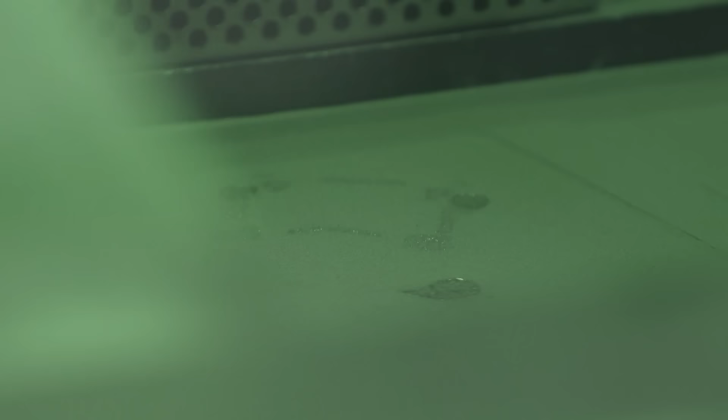Mobility. A concept that humans have pondered over for centuries, if not millennia. And experts keep coming up with the same questions. How can we transport more people and freight? How do we make mobility as safe as possible? And most of all, how do we make it environmentally friendly?

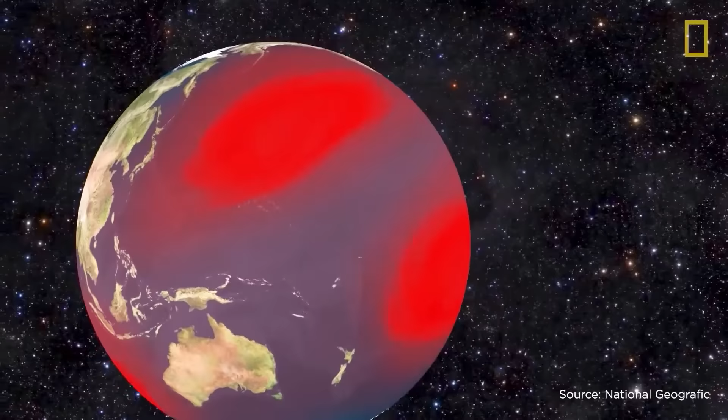About 8 billion people around the world want to enjoy mobility. About 4 billion people fly on planes each year. And about 1 billion cars drive on our roads. Cities are growing, traffic increasing, and environmental pollution is getting out of control. New environmental movements like Fridays for Future and activists like Greta Thunberg denounce the state of affairs.

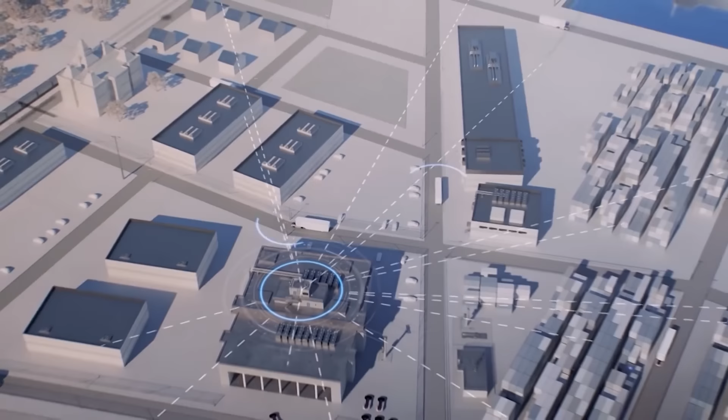There is little time to act. Climate change is man-made and almost impossible to stop. At the same time, digitalization radically changes entire industries and society as a whole. And that opens up new opportunities.

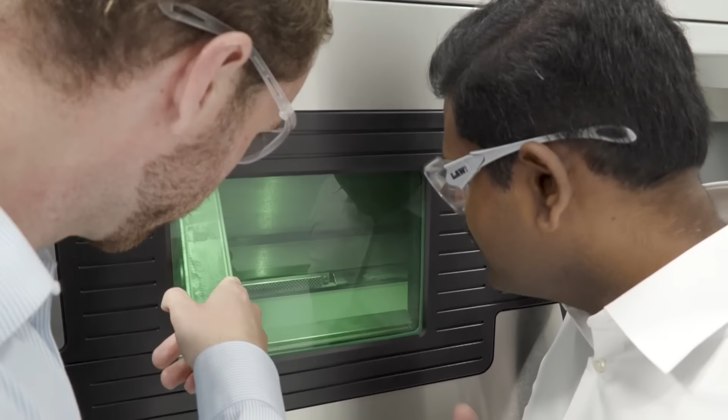We meet experts who rethink mobility and who make it possible. They use 3D metal printing and create coatings for components used in cars, airplanes, and space travel. Our film enters the world of hidden high-tech, super technologies intended to make mobility and our cities safer and cleaner.

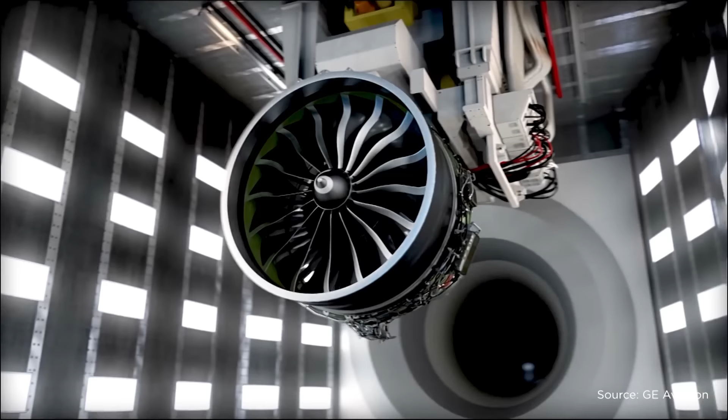Around the world, companies work on making manufacturing more efficient and environmentally friendly. We are visiting a Swiss company called Oerlikon that develops and makes products for the aerospace and automotive industries. The Italian engineer Alessia Toscano, for example, works with 3D printing.

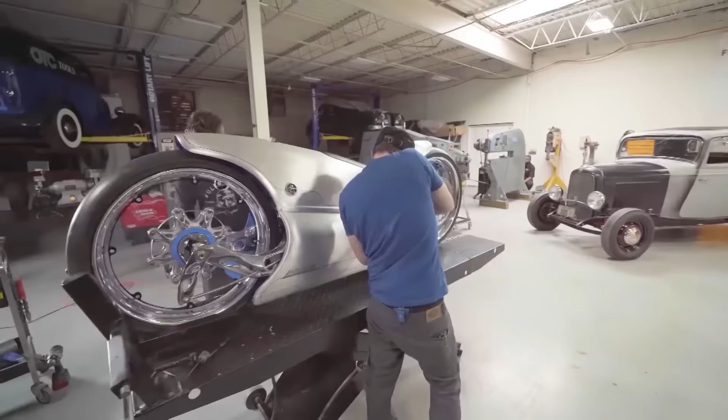I think that with AM you can customize your own part. If you have any part that is in your mind, you have the freedom of design to do whatever you want to print. So I think this is the only technology where you can do this, and that will be the key for the future.

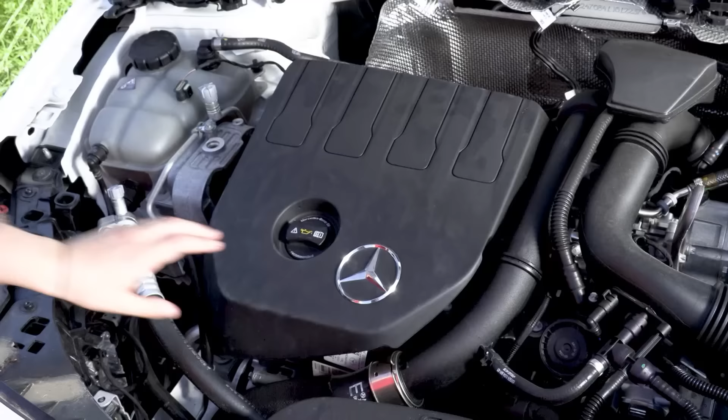She's on a trip to Switzerland, where she wants to talk to her colleagues at Oerlikon on the topic of coating. But first, she takes a break to show us which car parts will soon be printed, rather than made conventionally, including pistons of combustion engines and gas pedals.

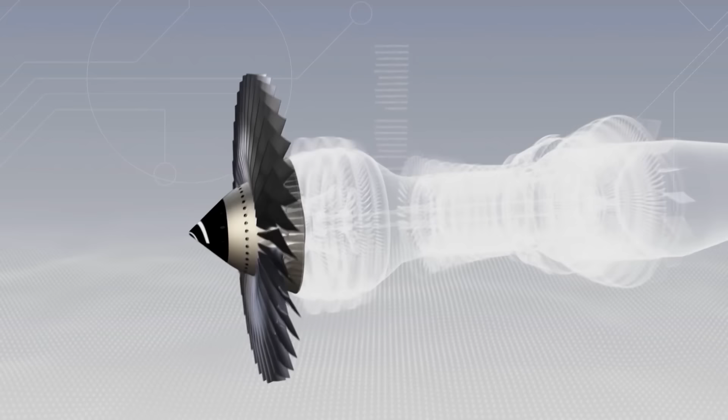And what are examples of 3D printed components? So, for example, for a car, we can produce in AM the bracket, the hinge that lets you close your door in your car. Or, for example, for a plane, we can AM manufacture the blade and the turbine. And for rockets, we are also working to manufacture more and more parts. So AM now is evaluating all the possibilities of all the components in every sector.

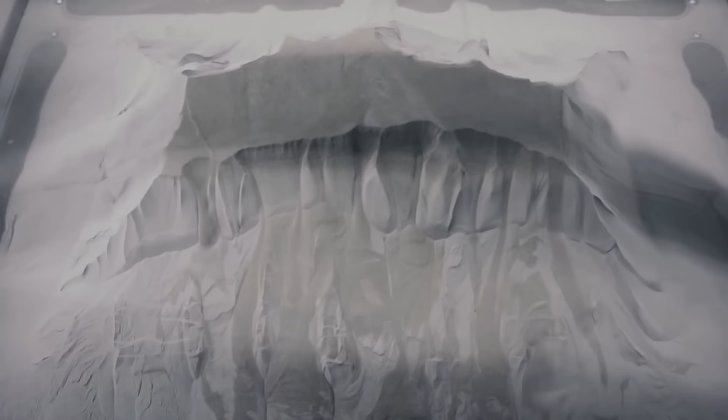So what is additive manufacturing? How does powder turn into a part? And where can we learn more about this technology that is considered an industrial revolution? Well, of course, we have in Oerlikon AM different plants in the USA. For example, we just opened a new center in Huntersville, and they're doing a lot of development. Alessia continues her trip. We will meet her again later. But first, we are going to America.

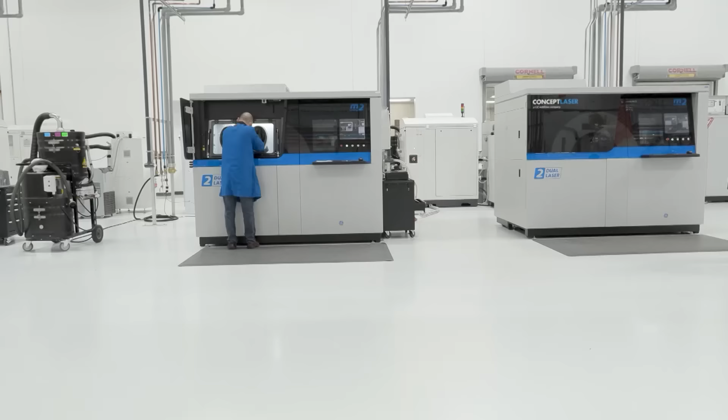There, on the southeastern coast near Charlotte, a new factory for 3D metal printing has just opened. Here we are going to meet leading specialists in the field of additive manufacturing, whose previous clients include NASA and Lockheed Martin. They develop and manufacture components for aerospace applications. Right now, they are using a metal powder to print an antenna bracket that is far more rugged and lighter than anything that came before it.

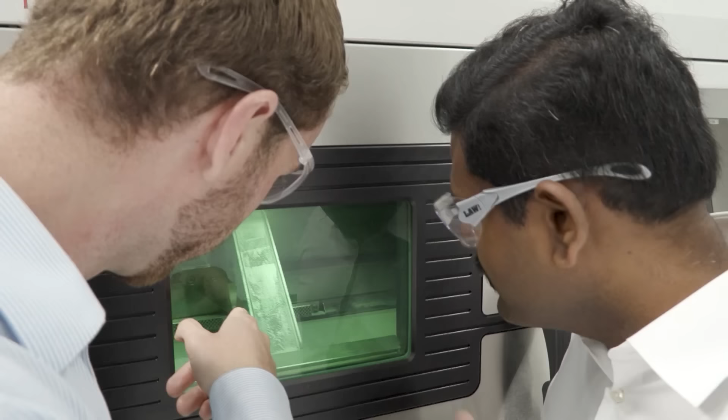This part was developed by RUAG as a demonstration of what could one day fly into space as part of a communication satellite, which provides navigation support using digital geodata. So Oerlikon AM focuses mainly on additive manufacturing, which is often referred to as 3D printing. We focus mainly on metals here. So you'll see behind me some of the printers that we have that do the additive manufacturing process.

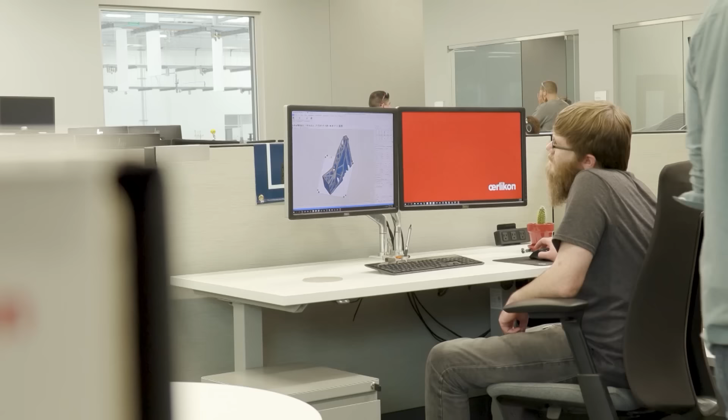And our goal here is to industrialize AM so that we're no longer in the prototype world, we're now moving forward into the production world and making parts that ultimately are going to fly on planes. This factory is the only one of its kind in the US, featuring all the relevant production steps under one roof. From powder blending and testing to printing, heat treatment, finishing, and quality assurance. You could say that here, components are literally made from dust.

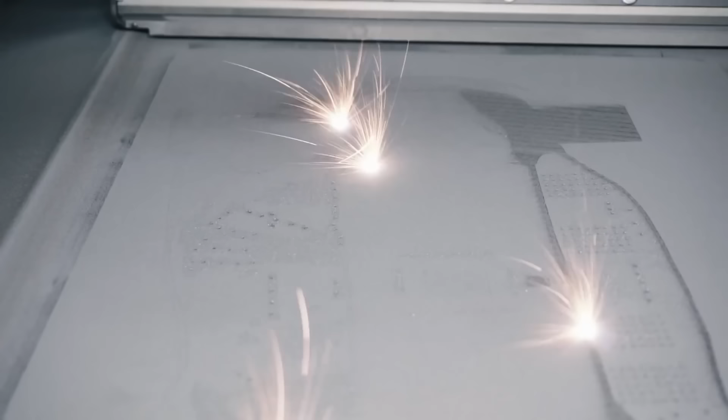We want to understand this better. How does 3D metal printing work? And what makes it so fascinating? Later, we will return to see what became of the antenna bracket.

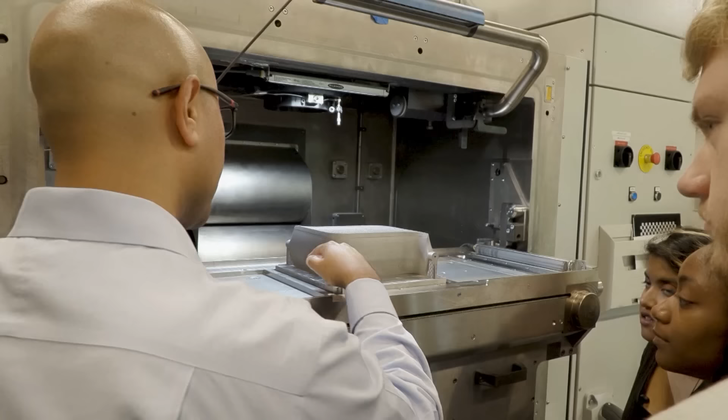To get more detailed information, we are visiting a scientist who's deeply involved in researching additive manufacturing at one of the oldest universities in the country. Penn State University in Pennsylvania. Here we're meeting Abdallah Nassar. With his students, he continues his quest for new applications of this technology.

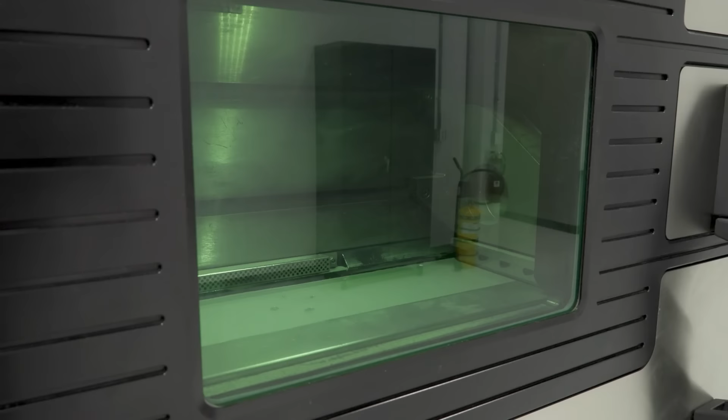So today, additive manufacturing brings together very advanced computer systems that allow you to design very complicated features with the ability to actually build those features using technologies that require lasers moving at very rapid speeds to build up parts literally out of powder. And the newest, where the technology appears to be going is in building ever more complicated structures. Building structures that have never been before built. Building structures that look like nature. Something that doesn't look like it's been manufactured by a human being.

And what those allow us to do is optimize design so that we can get the best performance out of every component that we build, components for custom applications, whether that be for an aerospace application or for a custom car application or for an implant that you put in your body. But what differentiates 3D printing from conventional manufacturing methods?

Classically, designers thought in terms of boxes. Everything was a box, and what you do is you had to take away material from that box to build your finished components. Today, we're reversing that paradigm entirely. Rather than starting from a box, we're starting from nothing. And we're adding little blocks or little layers or little tracks of material one at a time to build up components additively. That's why it's called additive manufacturing, rather than conventional subtractive manufacturing.

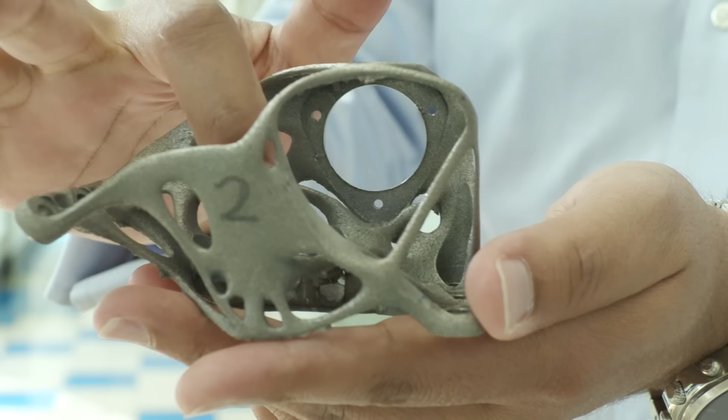Here's an example that shows how important 3D printing will be for the future of mobility. So in this particular case, this structure is to hold a very simple sensor that's put on an aerospace application. But again, without those sensors, your airplane can't fly. So it's a little device that all it serves is to mount some sensors on your vehicle. But without it, nothing happens.

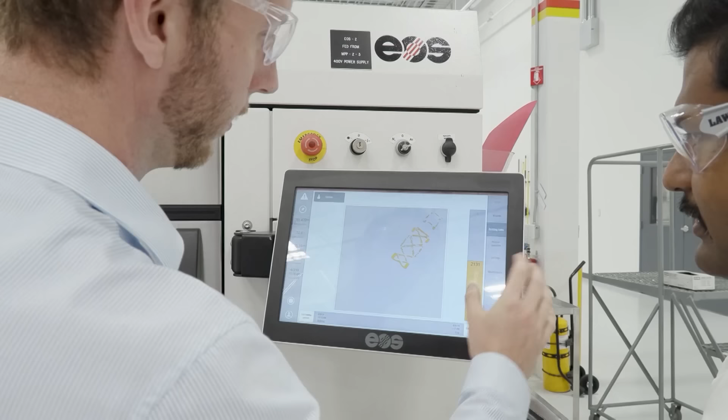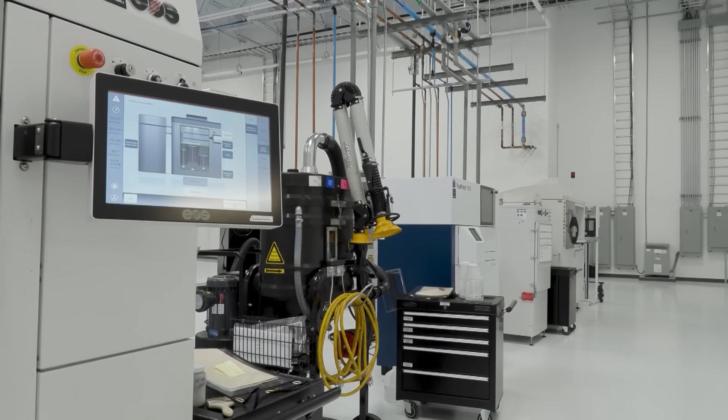We are returning to the production of the antenna bracket. It's coming along nicely, but needs a little more time for what's going on beneath the surface. In the meantime, we keep exploring the factory. This time, the quality testing lab. Because quality is everything, whether in cars, airplanes, or even orthopedic implants. If the metal powder for 3D components is used properly, the final product will be lighter, stiffer, more efficient, and environmentally friendly.

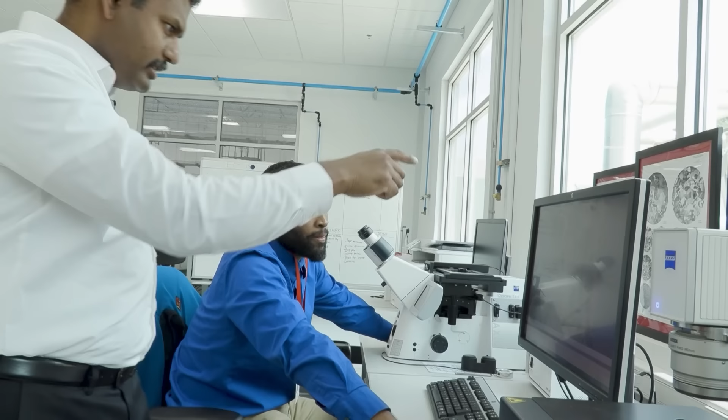One of the main aspects of additive manufacturing, with the design freedom, we are able to produce parts which are just needed for the application. So we are reducing the redundant material in the component, so thereby we are serving the actual application, as well as we are reducing the weight, and thereby we are reducing the energy consumption of the component from the manufacturing to the end of its life.

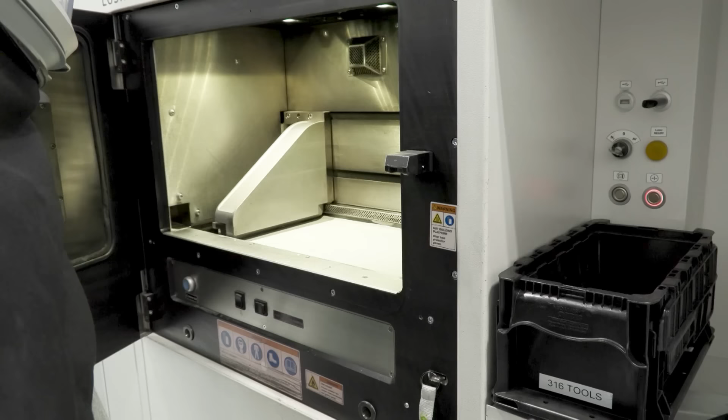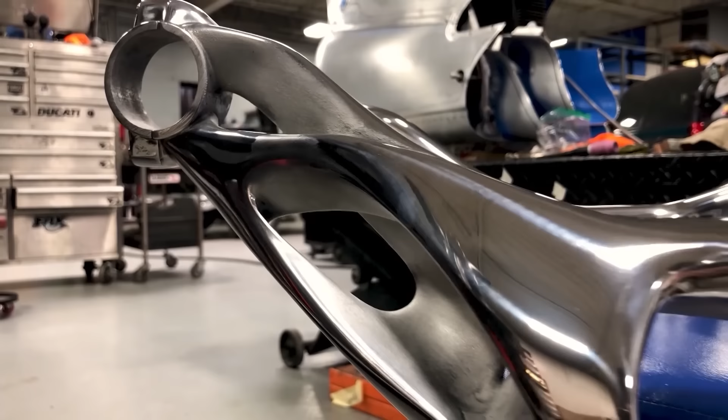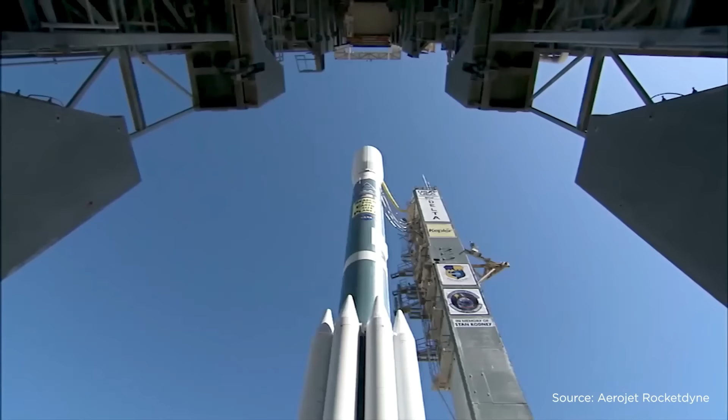With additive manufacturing, pollution is reduced right from the start, when the material is transported to the factory. There is almost no waste in the process, so less material is needed compared to conventional machining. A laser beam is used to melt the powder into the shape of the final component and create geometries that might otherwise be impossible to manufacture. 3D printed parts are also important for another mobility application: space flights. In the coming years, humans will go back to space, and additive manufacturing will play an important part.

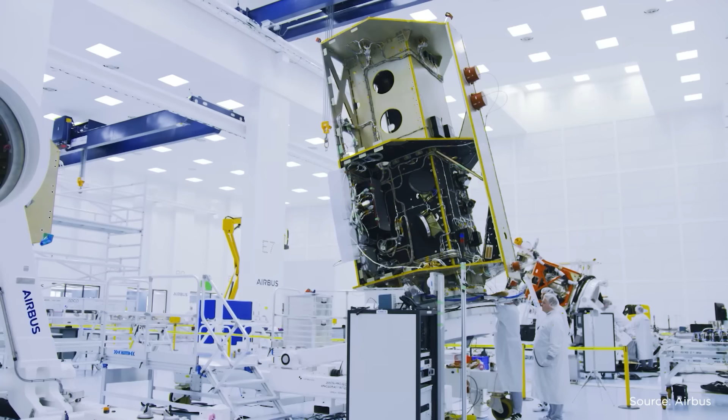When it comes to aerospace, two things matter. One is functionality, and second one is the lightweight structures. When you manufacture something out of conventional manufacturing, one is design constraint, and also you do not have enough incentive economically for removing the redundant material. But in space application, like I said, the performance is very important, and also the lightweight structure is important. Both can be realized using additive manufacturing. So these aspects make additive manufacturing a very, very viable technology for aerospace and future space flight missions.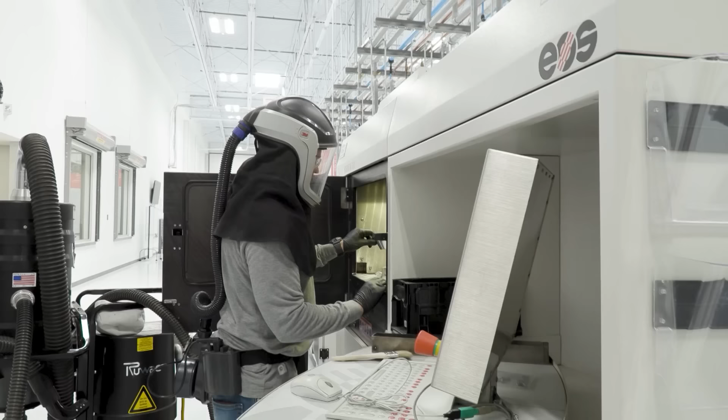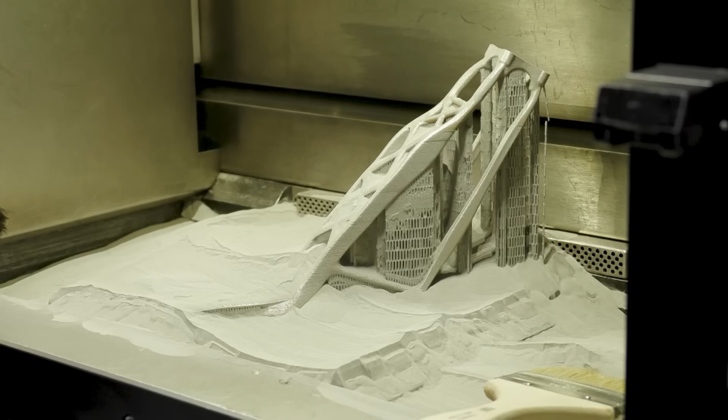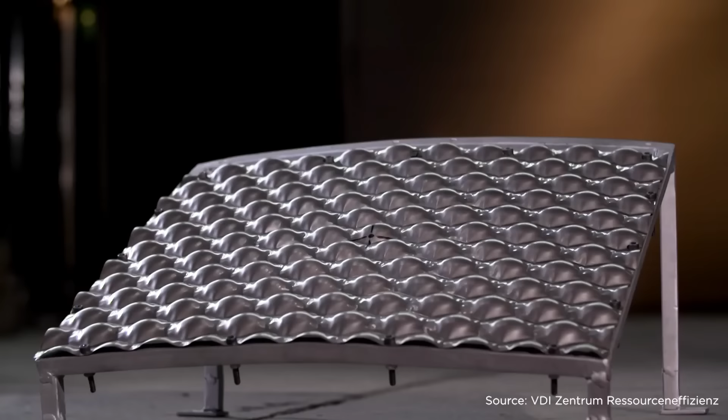And then the wait is over. The antenna bracket for the satellite is finished. Like an archaeologist, a technician uncovers the bionic part. It looks a bit bizarre, almost like something you would find in nature. In the field of bionics, experts emulate successful structures found in nature. A classic example is the honeycomb, which is very sturdy but light at the same time. Strain on the honeycomb is distributed across the entire structure and thereby prevented from causing local damage. Bionic honeycomb structures use this very principle in everyday applications.

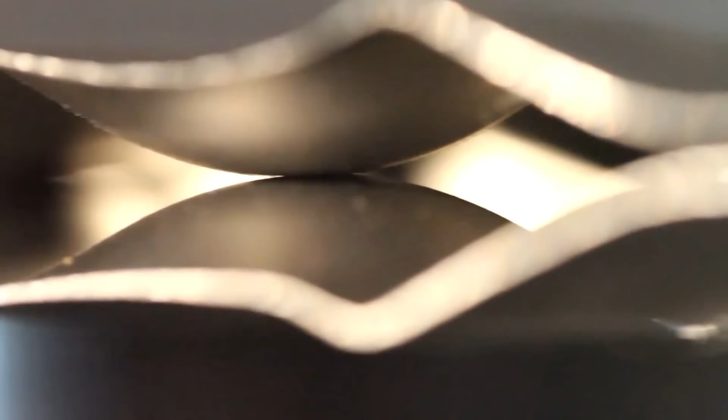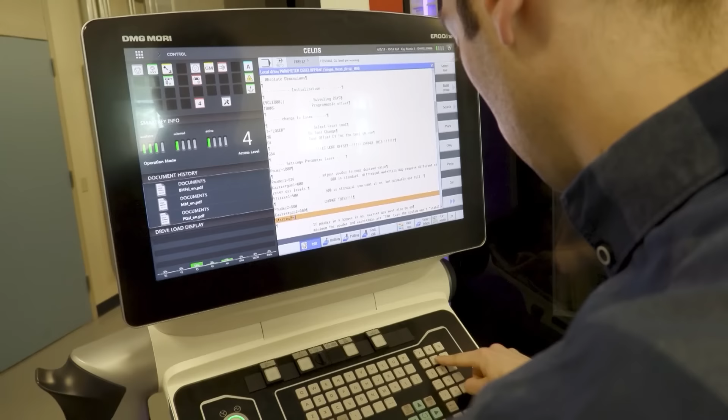We learn from nature in terms of understanding that particular types of structures are particularly suited for a specific application without having to go through the math. But the interesting thing is that if you do go ahead and go through the math, what you find many times is that the natural structures are the optimized structures. So it's a back and forth process where we're inspired by nature. And then we use that inspiration to go back, do our engineering calculations, and come up with the structures that we really need to fit an application.

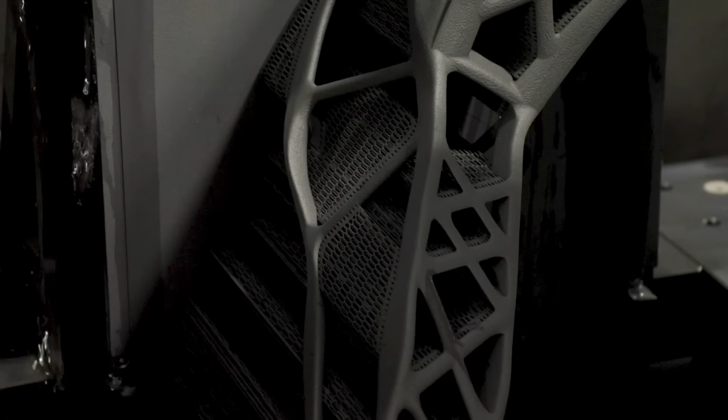Now the production of the antenna bracket goes into its final phase. A technician removes the structure from its base, using an electric wire that is heated to a temperature of several thousand degrees. Then the component needs to be inspected via a blue light scanning process, which is fitting since the bracket is designed to be launched into space on board an ultra-complex and expensive satellite.

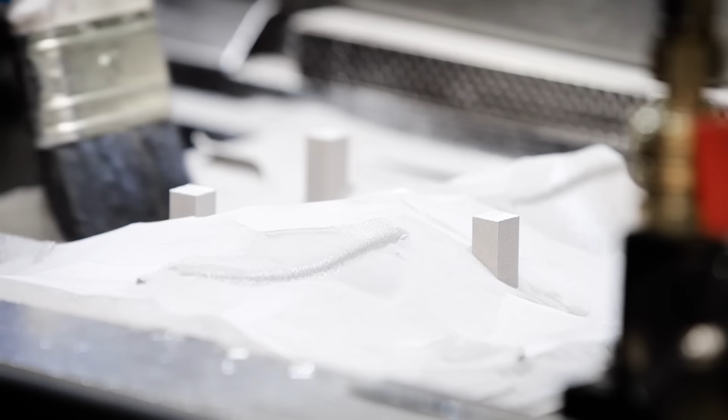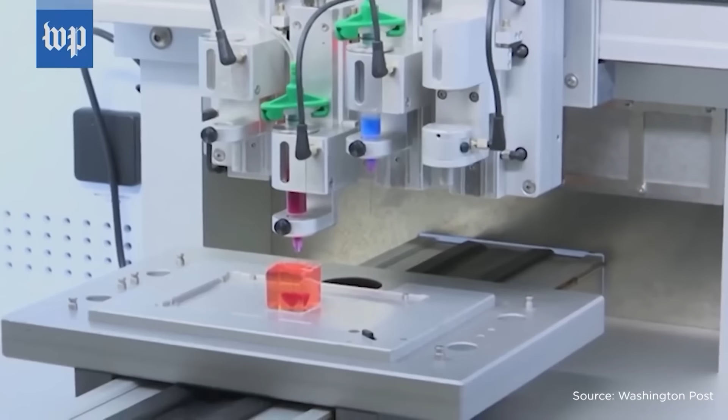So both additive manufacturing and coating technologies absolutely influence your everyday life. They're already impacting the aerospace, the medical industry, and more and more they are gaining traction into everyday consumer items. The car you drive will have many additively manufactured parts. The planes you're on already do or will soon have hundreds of additively manufactured parts. Even within your body, you will soon likely have an additive manufacturing implant when you get old.

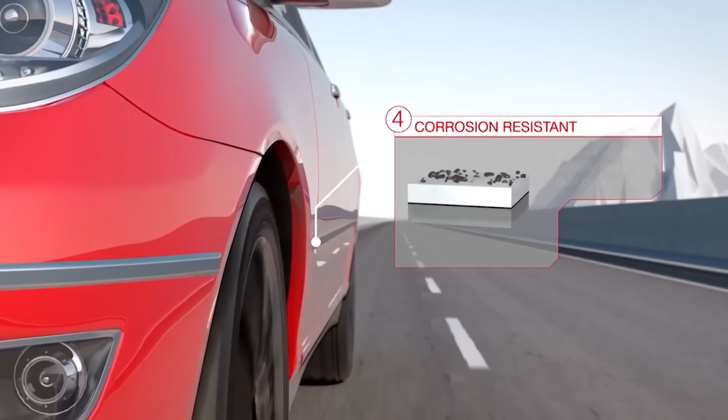Next to additive manufacturing, there is another hidden form of high tech: surface coating. Why is it so important? Because surfaces come into contact with everything. They come into contact with the outside world. And the outside world is, unfortunately, sometimes a bit too harsh. So you can have your component designed perfectly with a material that will withstand all the forces. To withstand these harsh outside forces, the coating process has to employ harsh forces as well.

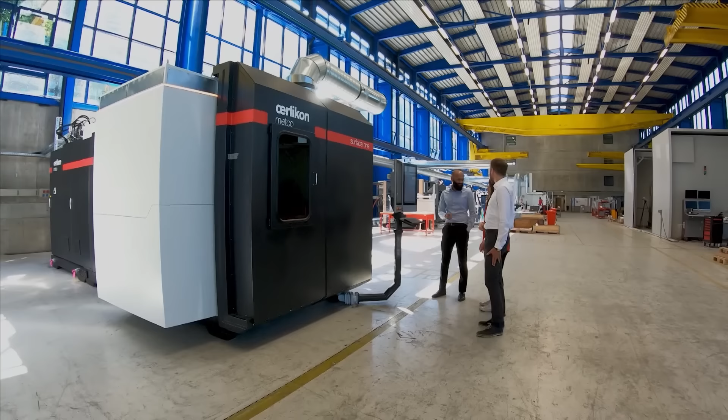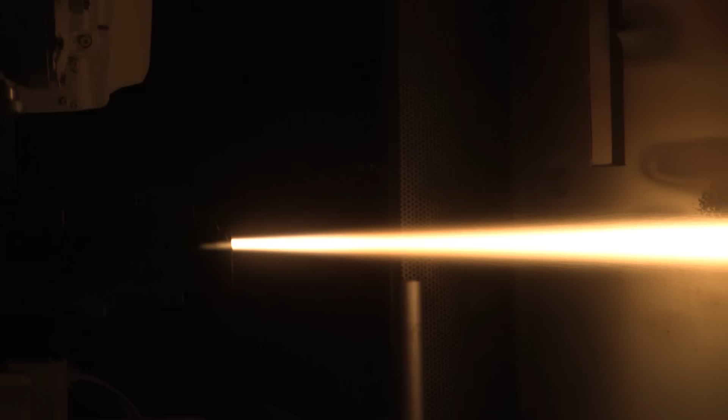We return to Switzerland. Here we meet Alessia again, who is inspecting a completely new machine together with her colleagues. The automated room-sized machine for thermal spraying is the only one of its kind in the world. It can coat components for the automotive and aerospace industries, using temperatures that are even higher than those found on the surface of the sun. What is special about this machine and this technology?

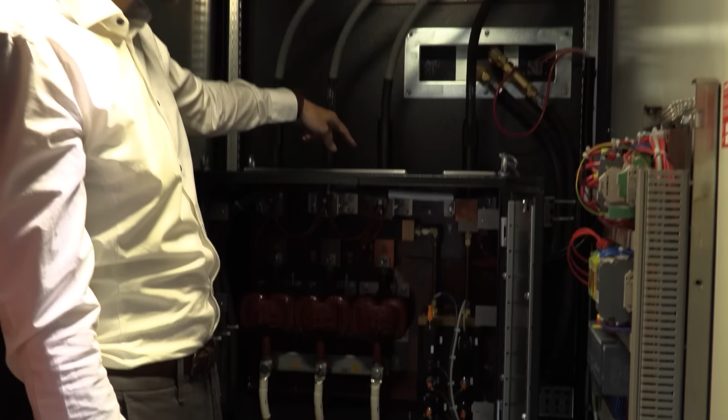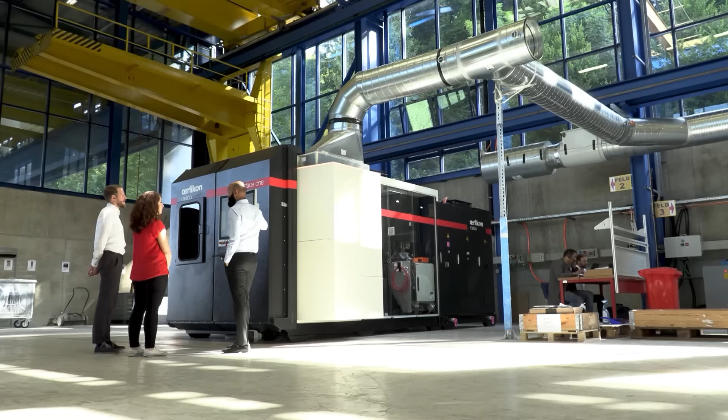It's pretty compact. It fits into a shipping container, which also leads to a reduced lead time in developing, and installation time is also reduced because it's all frame-based. So we can put it into a shipping container, pull it out, stick in, plug in water, electricity and gases, and then it's installed. So this is a huge step for our industry. The small factory is fully automatic and uses a robot to perform the work.

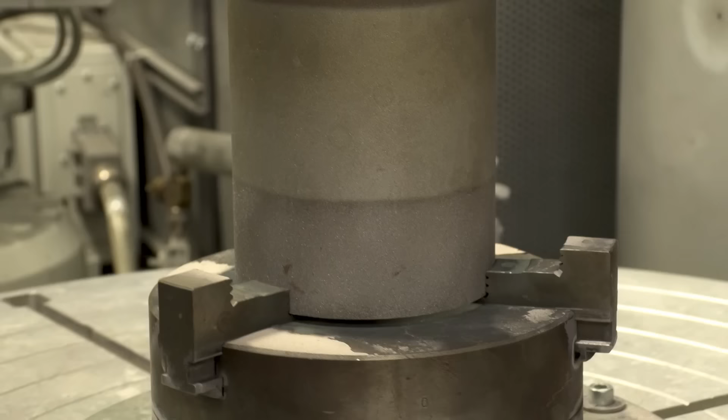Simply put, the part inside the machine is bombarded with metal powder and superheated by a flame. The temperature inside the flame can reach up to 16,000 degrees Celsius. The surface of the sun barely reaches 5,500 degrees. Molten particles reach the part and cool off, thereby forming a new ultra-resistant surface layer. Right now, the machine is coating a cylinder used in truck engines. What does this coating do exactly?

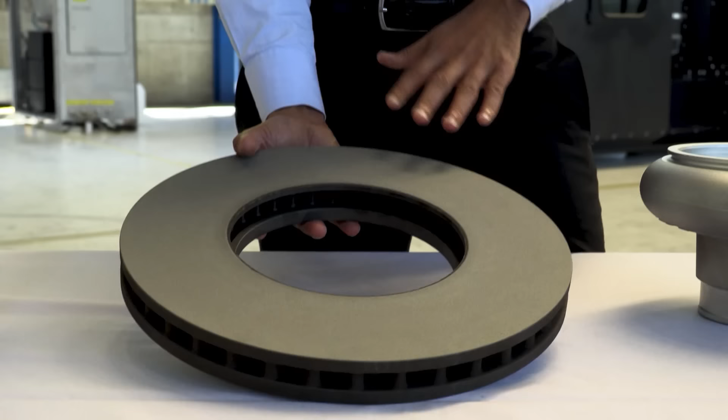Thermal spray has a wide variety of applications for mobility, but to give you a couple of concrete examples, fine dust emissions from automobiles is a major problem, and there are numerous environmental regulations coming out with regards to that. This is a perfect example of a brake disc from a typical car. With our coatings, we reduce corrosion and also the dust emissions from these brake discs, thereby increasing the lifetime of the brake disc, but also helping the manufacturers achieve their environmental goals.

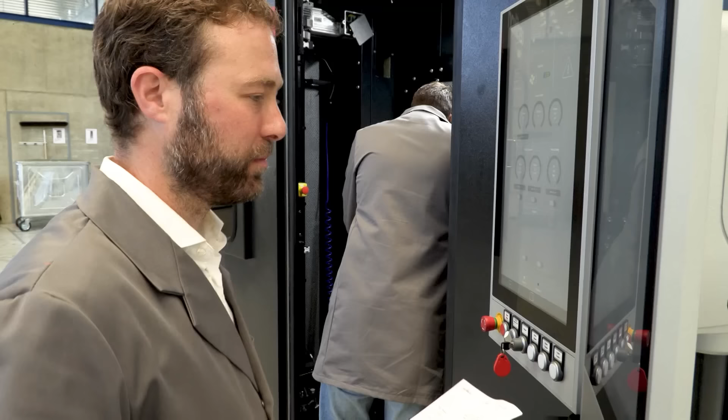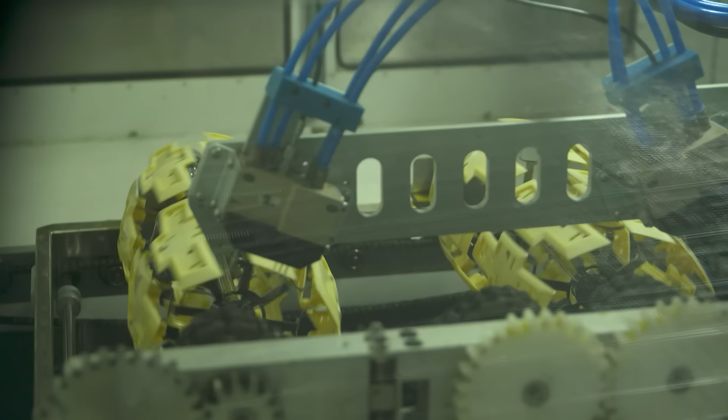And that's very important because according to Germany's environmental agency, the abrasion of brakes, tires, and roads now accounts for almost 60% of all particulate emissions. The cylinder is now coated and ready to start its life out on the road. Various different coatings are used in the mobility sector. The process employed depends on the final product. Parts inside an airplane's engine have to withstand temperatures exceeding 2,000 degrees Celsius and require a different coating than parts used on the outside or inside of a car. A lot of progress is being made in this field right now. For example, the so-called EPD process, used by Oerlikon Balzers, applies super thin coatings with special properties.

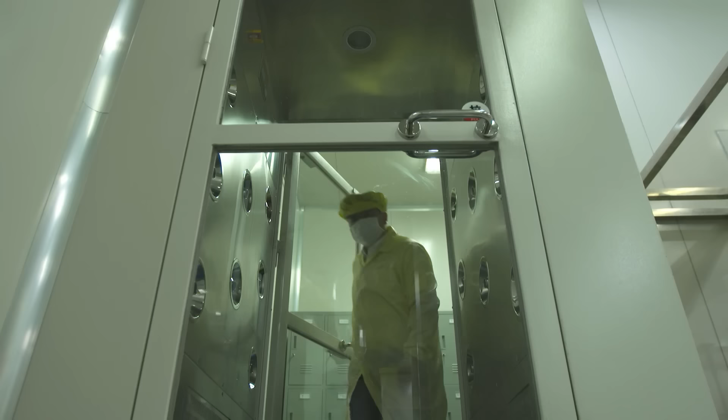To learn more about this hidden technology, we are going to the country that is home to the largest automotive market in the world, China. In Suzhou, 100 kilometers west of Shanghai, there is a machine that will play a big part in shaping the future of cars. Here we are meeting Louis Zhang, an engineer who studied in Germany, among other places, and who is an expert in coating technology, particularly the new EPD process.

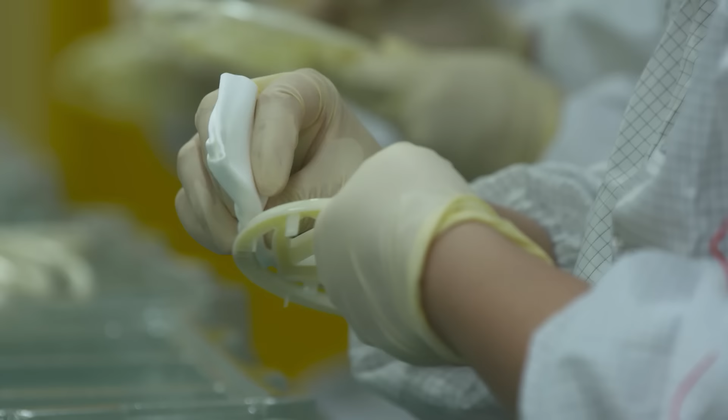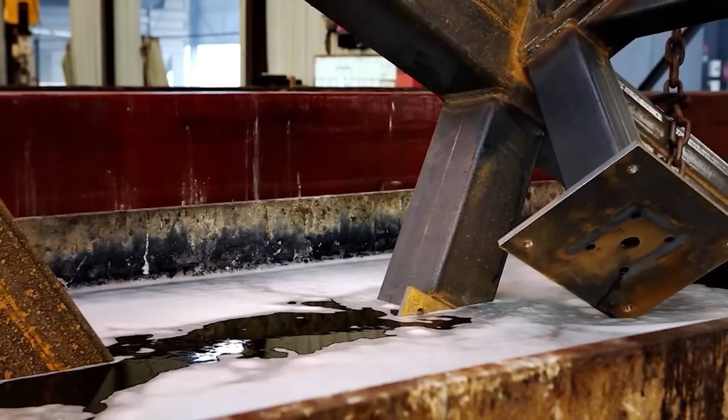The process happens in a so-called clean air room and does not require any substances that would be harmful to the environment. EPD is a replacement for the galvanizing process. This form of surface finishing is problematic since it uses substances like chrome-6. It also uses large amounts of water, pollutes it, and endangers people who come in contact with it. That's not the case with the EPD process. The giant, fully automated machine applies metal coatings to plastic parts, like trim parts for cars, in a way that is completely environmentally friendly.

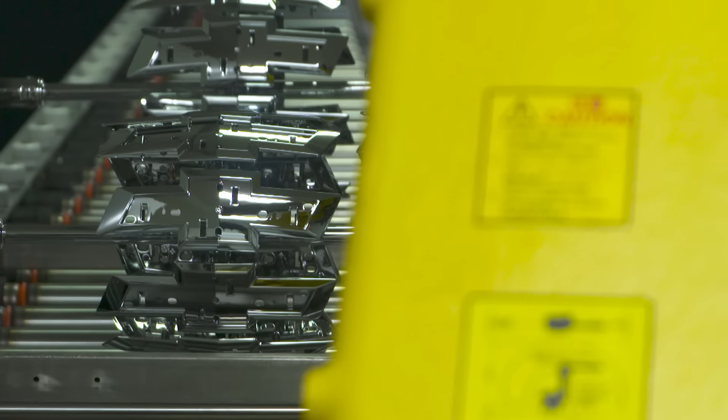Today, the machine is processing hood ornaments for Chevrolet and Buick, so the efficiency and environmental friendliness of mobility begins with coatings used on small plastic parts in our cars. All right, so now we can see here two cars beside me. And in my hand, I have the product you saw before in the factory. This has been coated in EPD before.

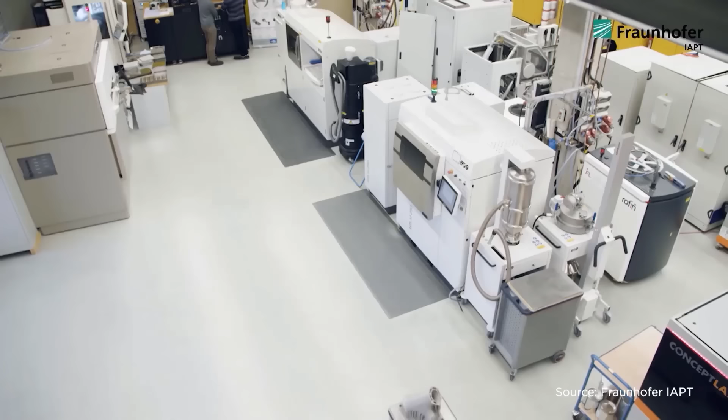Look around in your car. How many plastic parts around your cars? If you add everything together, you're getting 30% weight reduction, which means a reduction of emissions like CO2, like other poison gases. And the lighter the weight of the car, the less emission, the less consumption. The Fraunhofer Institute for Additive Production Technology estimates that 3D printing can save 6 tons of CO2 emissions per kilogram.

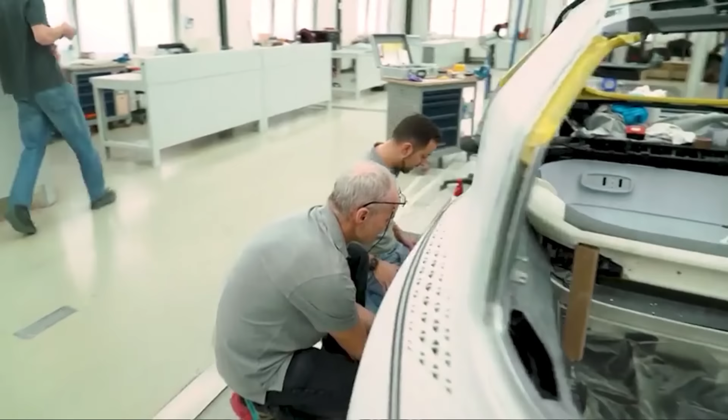Whether it's 3D metal printing, new materials, or the latest coating technology, components keep getting lighter. And less weight always means less harmful CO2. Increasingly smoother and harder surfaces, less wear and tear, lower weights and lower fuel consumption. That's the formula of the future in the field of coating.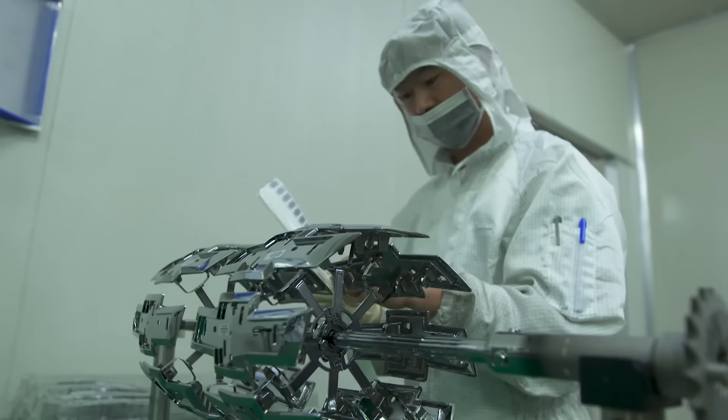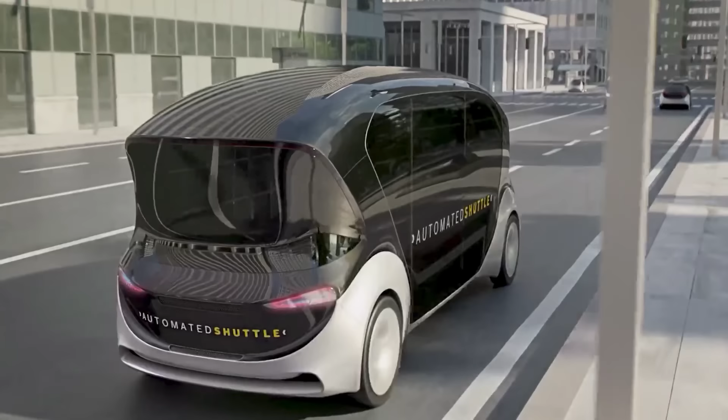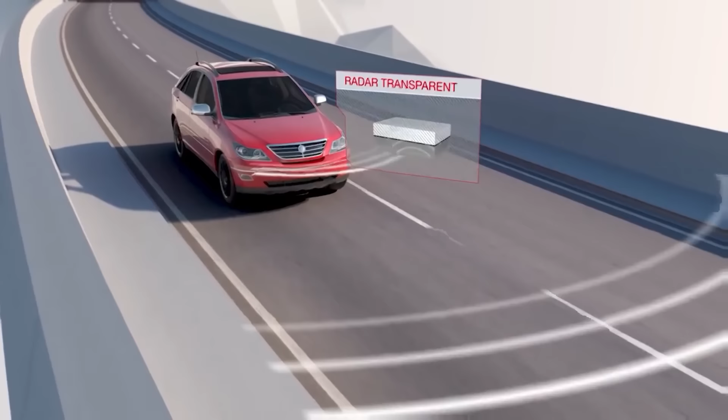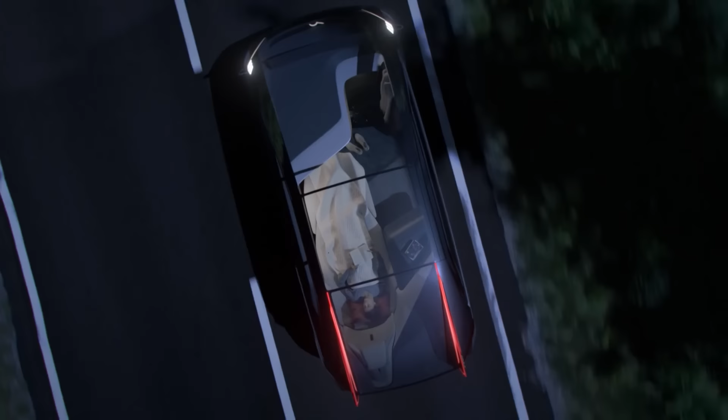Materials dictate literally life and death for us. Today, ever-advancing materials are required to fly your airplanes. You cannot fly an airplane without aluminum and titanium, materials that are just fairly recent when it comes to world history. Where we're at today is being able to digitally design everything. We're in the digital age.

Let's go back to China. Digital and green technologies are taken very seriously here, as can be seen in the area surrounding the city of Yangzhou. Traditionally, Yangzhou has had a large concentration of chemical companies, and that had an effect on the air in the region. But things are changing. Big car companies like Volkswagen have settled here. Their goal? Using clean manufacturing to offer clean products.

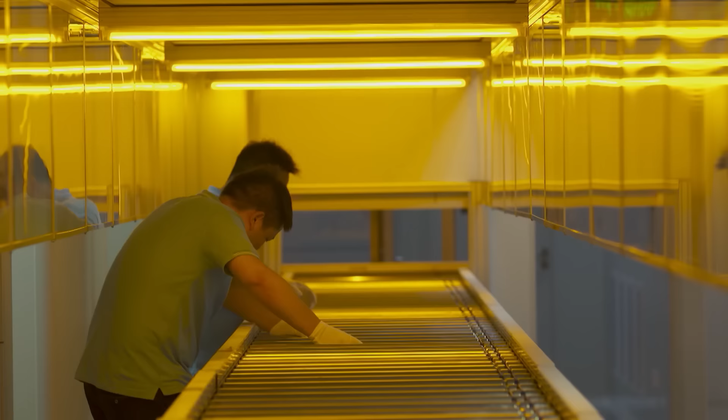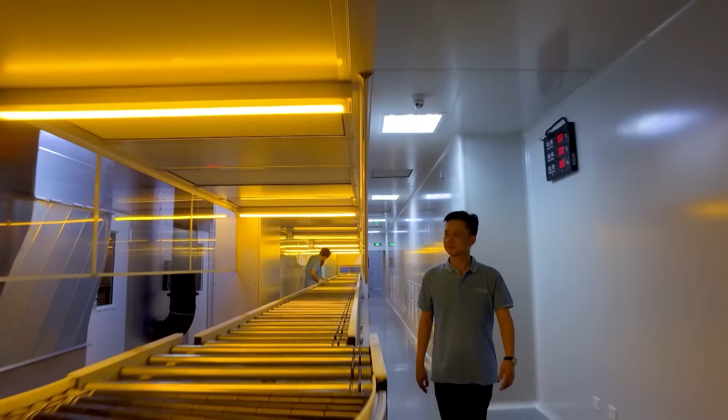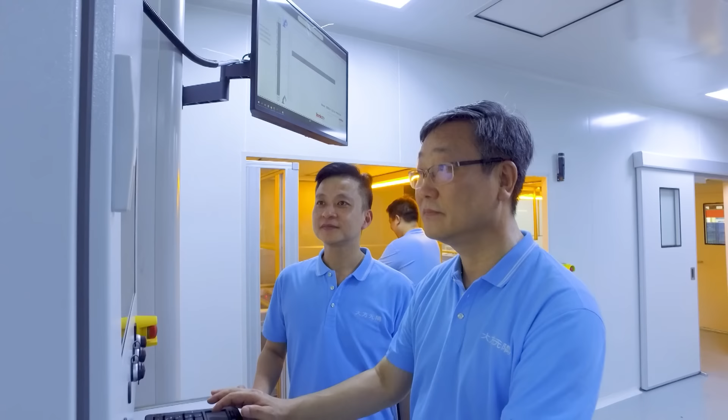Just a few final touches before the big launch. In Yizheng, Chinese automotive supplier Dafang Wuyu is preparing its new EPD coating machine. In a few days, it'll go into continuous operation for large brands like Volkswagen and General Motors. The general manager explains why coating technology is so important.

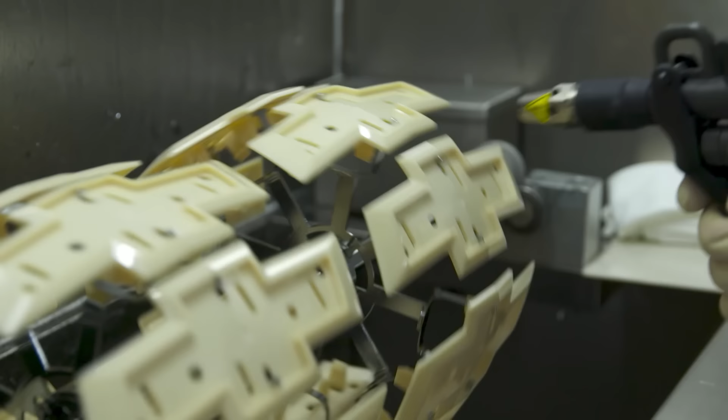That's to do with the broad spectrum of applications of coating and PVD technologies, from the engine all the way to the body. As car making moves toward lightweight construction, smart design, autonomous driving, 5G, the Internet of Things, and the networking of vehicles, this field of applications will continue to grow in the future. The PVD technology is a dry coating process. Because of it, coating processes have improved significantly, since traditional chemical processes cause significantly more pollution of the air as well as subterranean water.

The fact that environmental protection is now taken very seriously in China is reiterated by a government representative who appears on the day we're filming. Promoting innovation, structural change, the continuing development of production processes, and environmentally friendly production are goals that the Chinese government has been pursuing for a long time. Therefore, new processes and technologies used by high-tech companies such as DFWY are promoted in order to give even more impetus to the industrial sector.

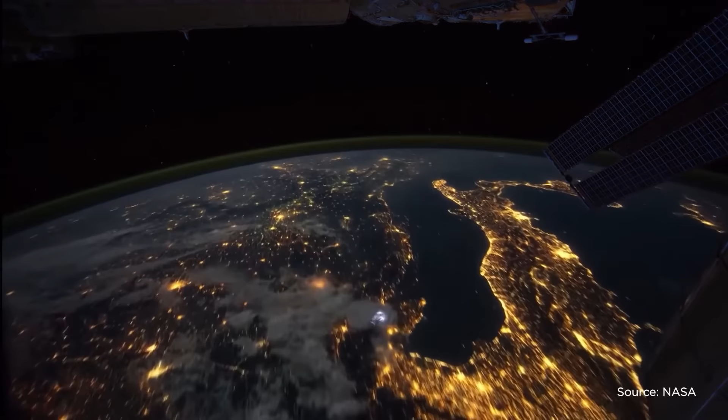But is that enough? Can hidden technologies really improve our carbon footprint in the future? After all, there are now 8 billion people on planet Earth. By 2100, this number is expected to climb to 11 billion. The urban sprawl continues. In addition, the demand for cars is increasing, particularly in emerging nations. Let's take a megacity like Shanghai, for example. With a population of now 26 million people, mobility has to remain clean.

Perhaps the World Environment Day, which takes place on the 5th of June each year, can help. So on this Environment Day that we have today, it's a really good celebration of additive manufacturing technology as well, because it's one of the tools that will hopefully reduce our carbon footprint and our overall impact on the environment. It will help us optimize energy savings for everybody.

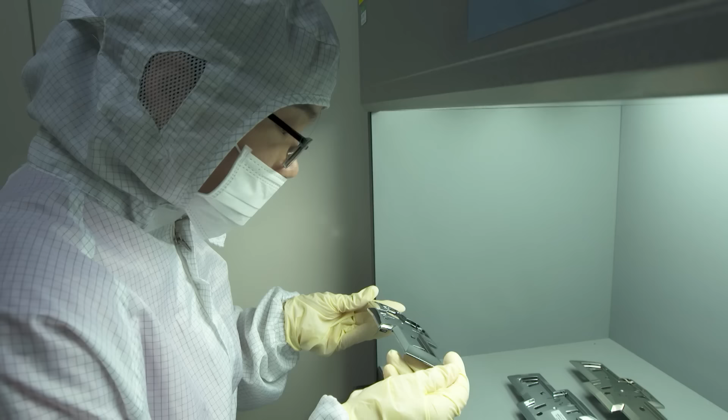Additive manufacturing, or industrial 3D printing, and surface technologies will play a role in how safe and clean our mobility will be. Despite trade wars, experts like Alessia Toscano and companies like Oerlikon are already working on it, on a global scale and across borders.